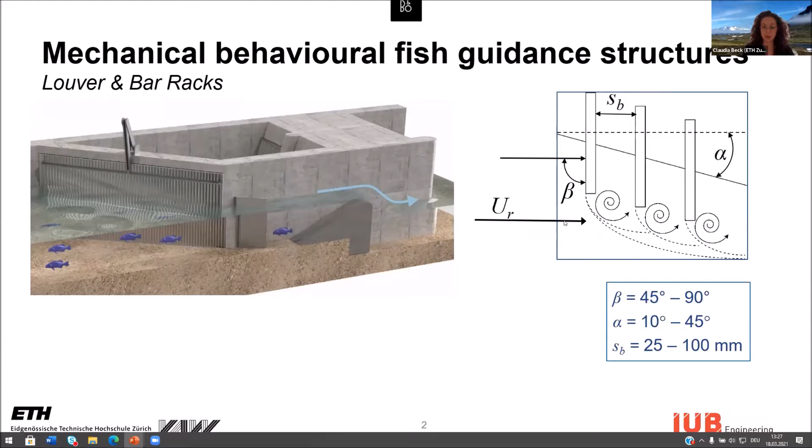The orientation of the bars to the approaching flow creates flow separation at the bar tips and high velocity and pressure gradients in front of the rack and between the bars, which are perceived and avoided by approaching fish. Due to this angle of the rack to the approach flow, the parallel velocity component guides the fish towards the bypass system and carries them safely downstream.

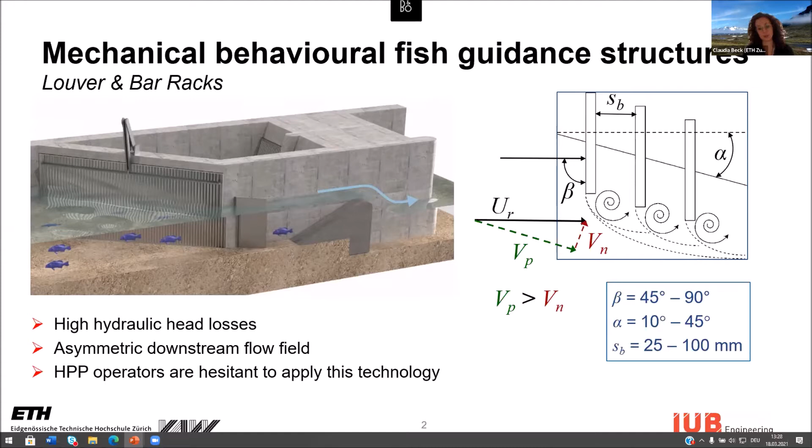While the fish protection and guidance of classical louvers and bar racks can be quite high, they have a lot of disadvantages for power plant operation and energy production due to high hydraulic head losses and an asymmetric downstream flow field. This is why hydropower plant operators are still hesitant to apply this technology in the field.

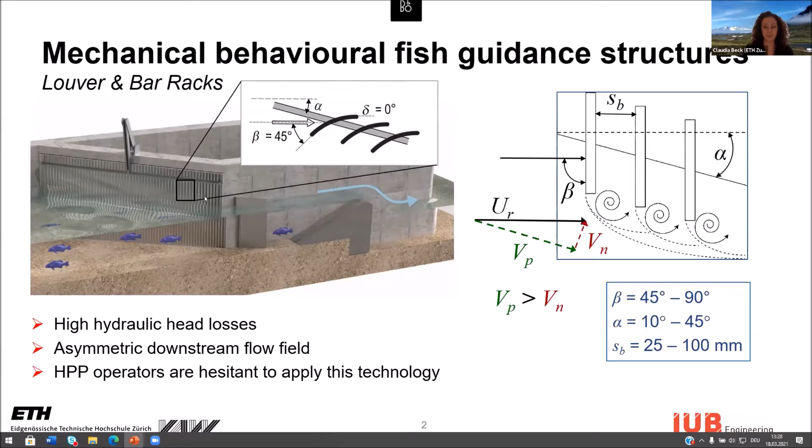So during my PhD, I developed a new curved bar shape to apply for these fish guidance structures and tested this new bar shape in the laboratory to evaluate the effect on the hydraulics and the fish behavior.

The laboratory tests showed that the hydraulic head losses could be much reduced by this curved bar shape. As an example, here we can see different mechanical behavioral fish guidance structures. Let's say we have a rack that is angled at 30 degrees to the approach flow with a bar spacing of 50 millimeters, and we take the hydraulic head loss coefficient as a proxy for the hydraulic head losses.

The tests show that with the curved bar shape, we can reduce the hydraulic head losses by a factor of 20 compared to the classical louver, and still by a factor of 4.2 compared to the bar rack with straight bars. This means that the hydraulic head losses are now in the same range as for typical intake trash racks, which are already installed at each hydropower plant.

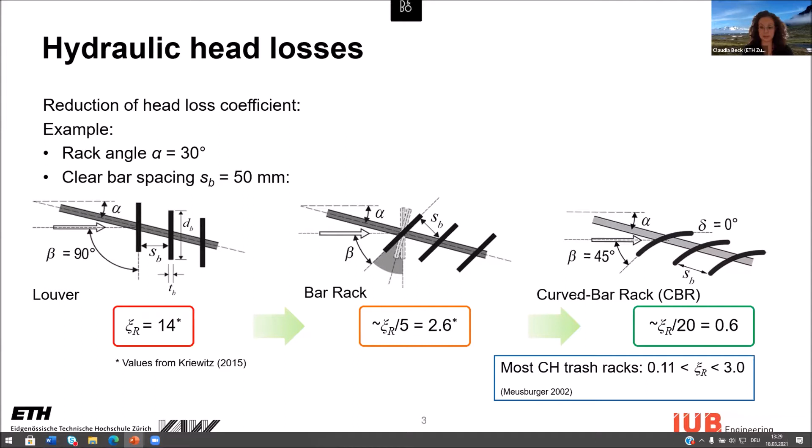The reason for the significant head loss reduction is the flow straightening effect produced by these curved bars. Here we see the flow fields of an angled bar rack on top and a curved bar rack on the bottom. This is the result of a 2D CFD simulation conducted by one of my former master students, and we can see that the downstream flow field is quite symmetric due to this flow straightening effect of the curved bars.

We have a gradual velocity increase towards the end of the rack, where the bypass would typically be placed upstream of the rack, which is advantageous for fish guidance as well.

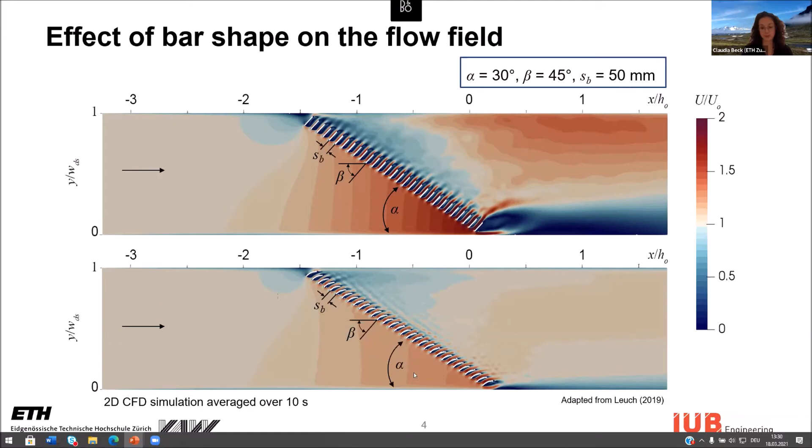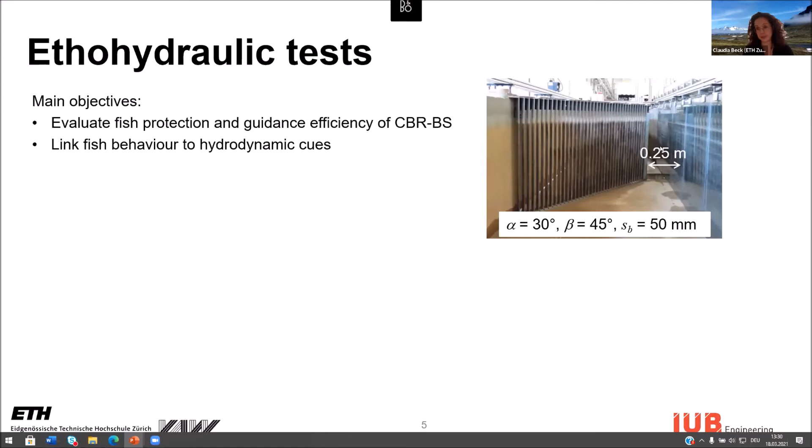So after optimizing the hydraulic performance of these mechanical fish guidance structures, we wanted to find out how the fish would behave around these structures. To this end, we conducted a series of live fish tests at the prototype scale model in a large laboratory flume with an adjacent open channel bypass, as seen in this photograph.

Recorded the fish behavior with these submerged cameras. So we tested 6 different fish species, including different cyprinids, salmonid, and the European eel, under 4 different hydraulic conditions.

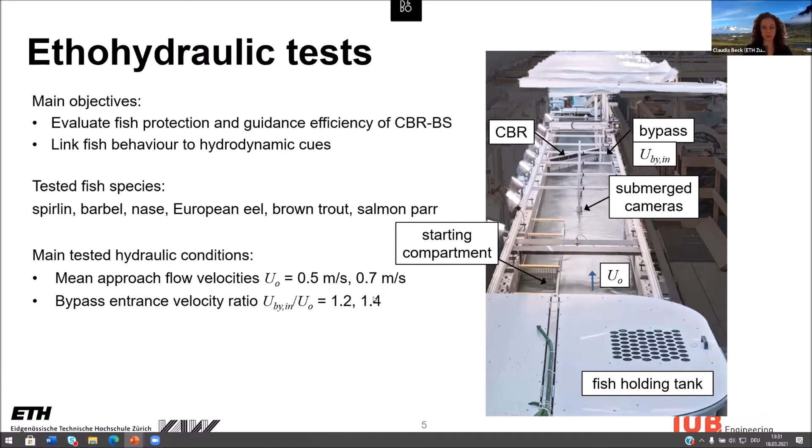We varied the mean approach flow velocity between 0.5 and 0.7 meters per second, and the bypass entrance velocity, classified as the ratio between the flow velocity right at the bypass inlet to the approach flow velocity, chosen between 1.2 and 1.4, as recommended by the US Bureau of Reclamation.

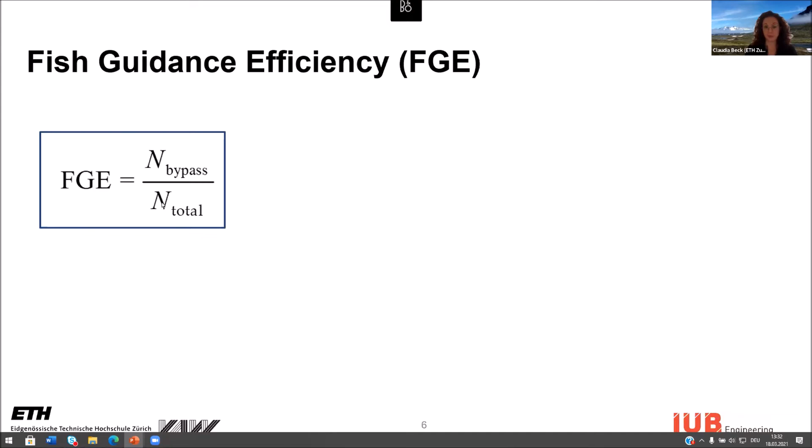From these tests, we could define the fish guidance efficiency, which is basically the number of fish being guided by the curved bar rack and swimming into the bypass, divided by the number of total fish that were actively swimming around.

The tests show that the fish guidance efficiency, the success rate, was over 85% for all the cyprinids and the salmon parrs, but lower than 60%, or around 60%, for the eels and the brown trout. So there's still some room for improvement for these two fish species.

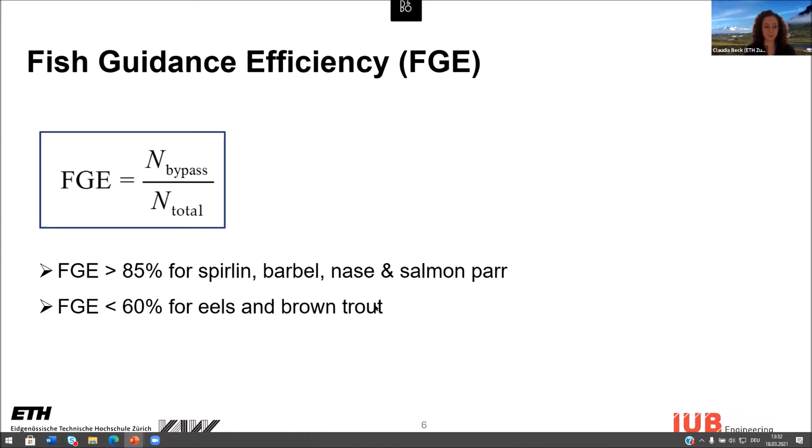In the next step, we wanted to quantify the effect of the flow conditions on fish behavior, and therefore conducted 3 binary logistic regression models.

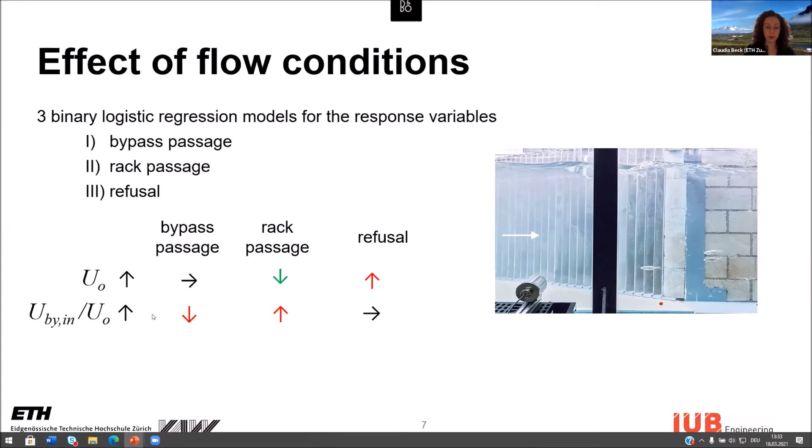From this statistical analysis, it became obvious that the approach flow velocity, as well as the bypass entrance velocity, significantly affect the fish behavior. Higher guidance efficiencies were achieved for higher approach flow velocities, and also for lower bypass inflow velocities.

We wanted to have a closer look at this first result, because it basically means that the curved bar rack has a higher behavioral barrier effect for higher approach flow velocities.

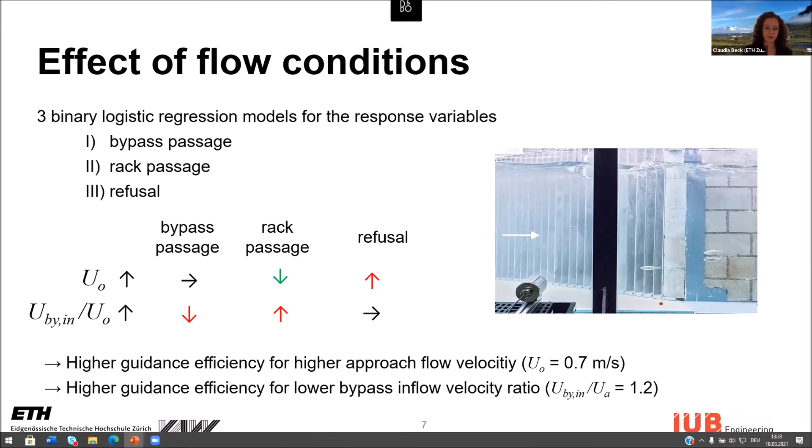To verify this hypothesis, we had a closer look at the hydraulic cues in the vicinity of the rack, between the bars and at the bar tips. For this, we set up a 3D CFD model and analyzed different hydraulic cues.

Basically the same result can be obtained when we model the pressure gradient, which is higher between the bars for higher approach flow velocities.

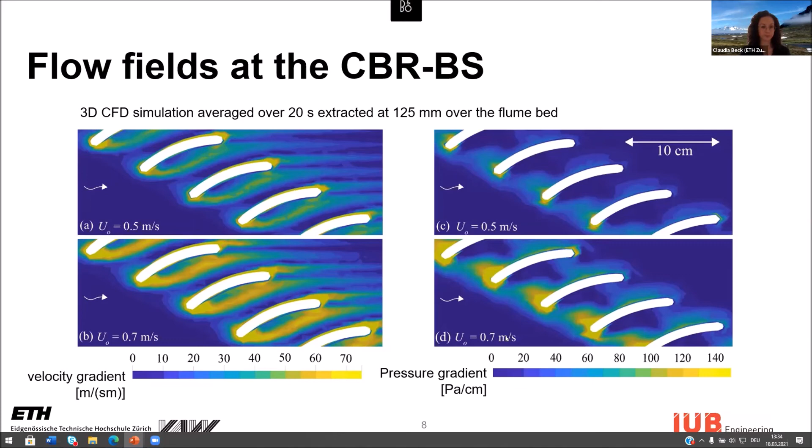To demonstrate the fish behavior at this curved bar rack in the laboratory, I have a video here, I hope it works, of 3 nase. These were actually the smallest fish which we tested, only 7.5 centimeters long.

You can see their behavior in front of the rack, and their reaction to the elevated velocity and pressure gradients. They avoid swimming through the rack, even though they could easily pass between the bars, and they are successfully protected and guided to the bypass.

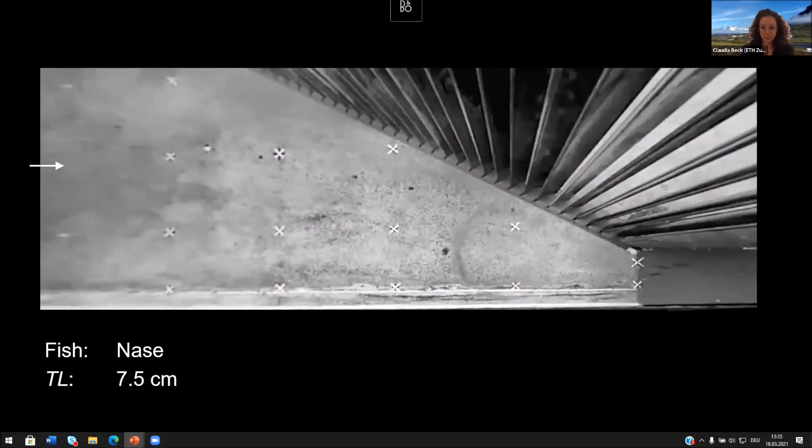To summarize, in this study I developed a novel curved bar shape, which greatly improves the hydraulic performance of mechanical behavioral fish guidance structures. The curved bars lead to a flow straightening effect, which leads to a symmetric turbine admission and to 4.2 times lower head losses compared to straight bars.

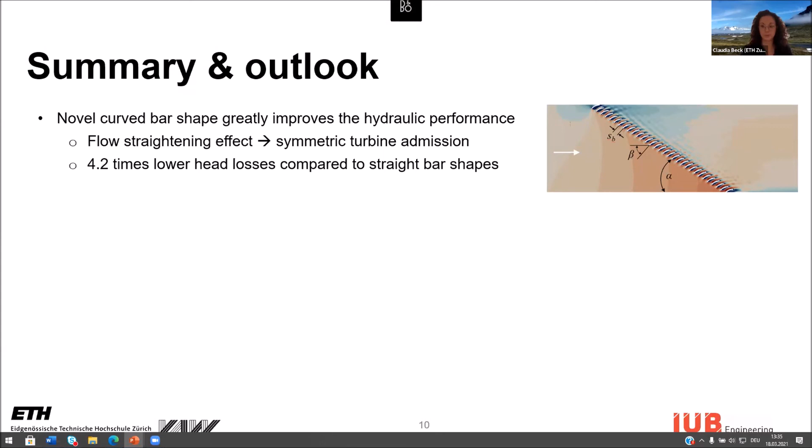The live fish tests we conducted proved the behavioral barrier effect of this kind of fish guidance structure. These results show the large potential this guidance structure has to protect fish at hydropower plants with minimal impact on hydropower operation and production.

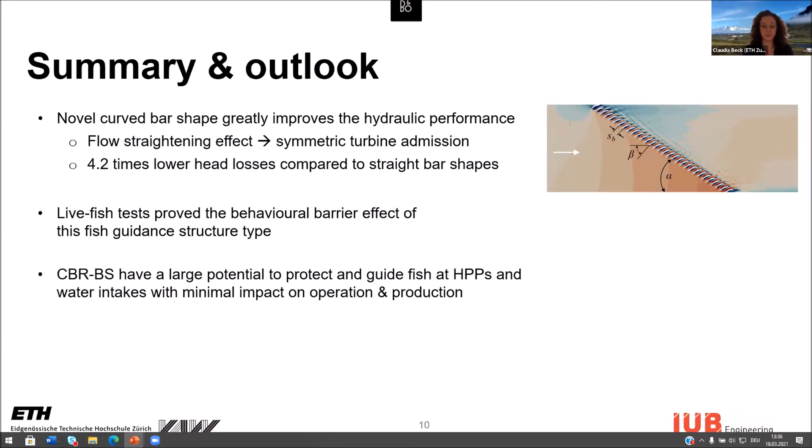The numerical model developed in this study now allows for further optimization of the bar shape for any specific hydropower plant. This was actually already done for a hydropower plant in Switzerland, where this new bar shape was developed.

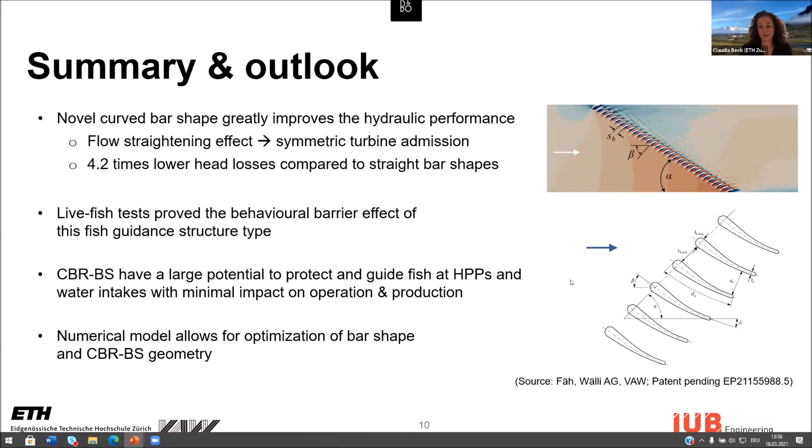The project has just been given to the authorities to check over, and if they approve, the first curved bar rack bypass system will be constructed in Switzerland in a couple of years, hopefully. So with that, I thank you very much for your attention.